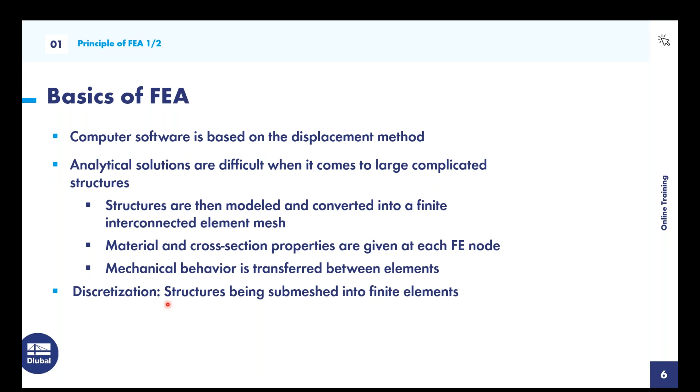And so with FEA software, structures are modeled and converted into a finite interconnected element mesh. Materials and cross-section properties are given at each of these FE nodes, or finite element nodes. And mechanical behavior is then transferred between these elements. So taking a structure and then submeshing it into finite elements, this is called discretization. So I believe this is an important vocabulary term to know when it comes to FEA software.

Then in the third step, the composition of the entire structure takes place. In the fourth step, the boundary conditions and supports are then defined. So these, for example, could consist of sliding, rigid, or hinge supports.

And then the fifth step, the displacement vectors can be determined by solving for the system of equations. And lastly, the support forces and then internal forces can be determined just like I mentioned with the displacement method.

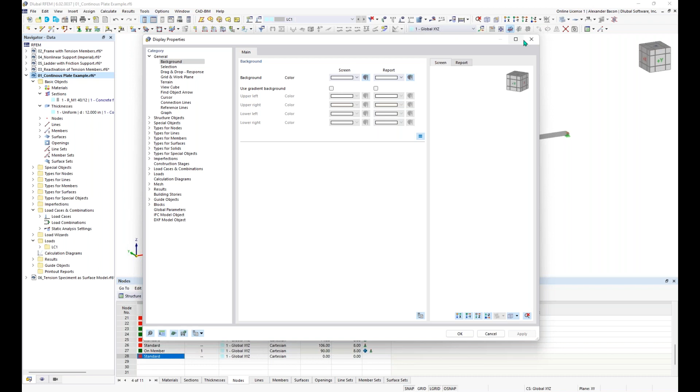So then next bit of information is here we have the work window. And so with this work window, you can see we have the graphical view of our model, and you can manipulate this model using the scroll wheel on the mouse. So clicking in the scroll wheel allows you to move the model in translation. Holding control and clicking in the scroll wheel allows you to rotate the model. And then, of course, scrolling in and out with the scroll wheel allows you to zoom in and out of the model.

Up at the top here is our toolbar, and this is filled with all of the necessary tools we would need to model graphically. Also, you can see, or should see, that this is all organized into categories, and you can move these bars around here and customize this to the way you like it. Or if you just wanted it to look the way mine does right now, you can right click in any of this open space here and hit the restore to default layout, and this will organize your tools like how it looks for mine.

Then up at the top here, we have the insert menu, and this is helpful if you can't find the tools you're looking for in the toolbar. So you can go to insert, and then you can locate the tool you're looking for as it's organized in these arrow menus.

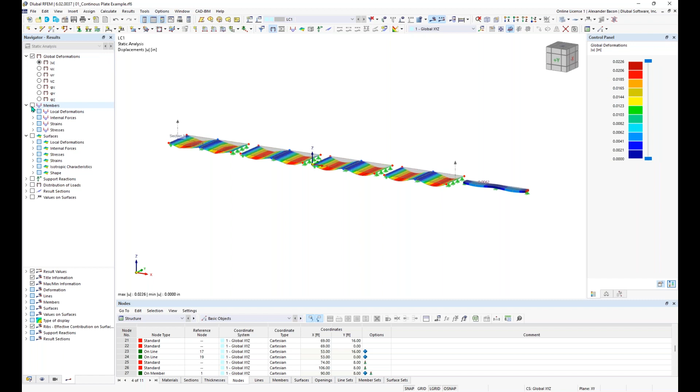So we can turn off visibilities, and then if I turn on, I've already run the results for this model. So if I turn the results on, I will have the fourth tab here, which is the results tab pop up. And in the panel is where I can turn on or off the results I would like to view. So you can see I can turn off the results from my member, and I can turn on the results, the global deformations. And so you can view your global deformations by checking that box.

You can view the results on your member, for example, and view internal forces such as moments, axial forces, and shear. And then you can do the same for the surfaces. We'll be going through this more in detail later. And that's the gist of viewing the results.

And one other thing I wanted to mention before we move on is highlighting. So if you drag from left to right, anything within the box that's engulfed in the box will be selected. And then if you drag from right to left, anything touching the box will be selected. So that is how highlighting works. And with that said, that's an overview of RFEM 6. And now we can move on to creating our continuous plate.

But before that, I would like to give a test of some questions. So the first question should pop up soon for you. And then once we go through these two questions, then we can move on. So I'll give everyone about half a minute to a minute to answer that.

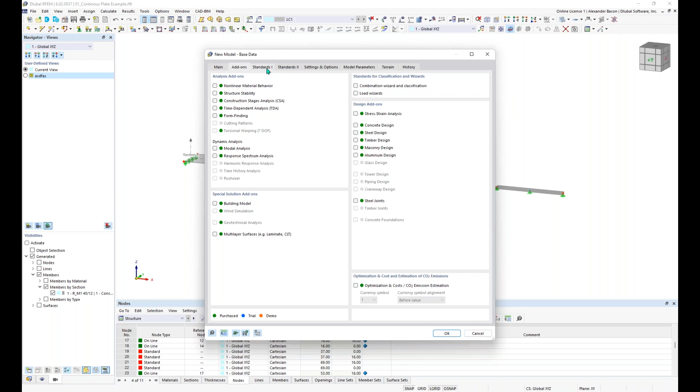I'm also going to turn off the standards for classification and wizards, as we're not going to be modeling according to any standard or creating load cases and combinations per any standard. So we can turn these options off, which means we can skip through standards 1 and 2 tabs up here.

Under the settings and options tab, we can choose the orientation of our global axes. So for our global Z axis, I'm going to keep this set to upward. And then also for our local axes, which is denoted using lowercase x, y, and z throughout the program, for our surfaces and members, we're going to keep this set to upward as well. Model tolerances and these other settings we can leave as default.

I'm going to be using imperial units throughout this training. You can switch between imperial and metric units by going down here to this button and clicking on units and decimal places. Then you can go down here to load, save template, and change the default units you have set, and change between units as well here. I'm going to keep mine in imperial units, click OK, and this should open up a blank model.

Now we can edit the grid points and units. First you'll see in the blank model that our grid has been created here, it's a blank grid, and we have our grid points here. Right now by default, if I go up here to the button settings of work plane, grids/snap settings, if I click on this, you can see I have mine set to a default of 50 by 50 grid points.

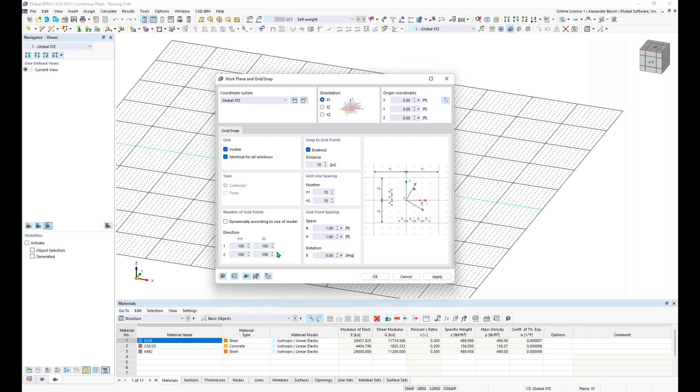So I saved this as a template, and we can go to load template. You can see I saved this as a template called student training. You can set different templates as the default if you're using the same settings over and over again. So if I click OK, you can see that my template was loaded in, and I have 100 grid points by 100 grid points with a spacing of 1 foot by 1 foot.

So now if I click OK, you'll see that my grid here was increased by 50 grid points. And so now we can get into modeling our concrete slab.

The first thing we want to do is go up here to the new rectangular surface. With this tool, we can use this to, like it says, create a new rectangular surface. And this surface is going to have a material...

Sorry about that. The surface is going to have a material and thickness, so every surface in RFEM has to have a thickness and a material set to it. You can see you can choose a stiffness type for the surface, we're going to stick with standard today, but we do have rigid and membrane and load transfer.

First, we're going to create a new thickness using this button here, so we're going to hit create thickness. This thickness is going to be uniform. And every surface thickness has to have a material set to it.

So I'm going to click on this button here to import a material in from the material library. I filter to the United States, concrete, and the ACI 318-19. I'm going to choose concrete with a compression strength of 4,000 psi, click OK. Now I just need to enter in a thickness, and that's going to be 12 inches.

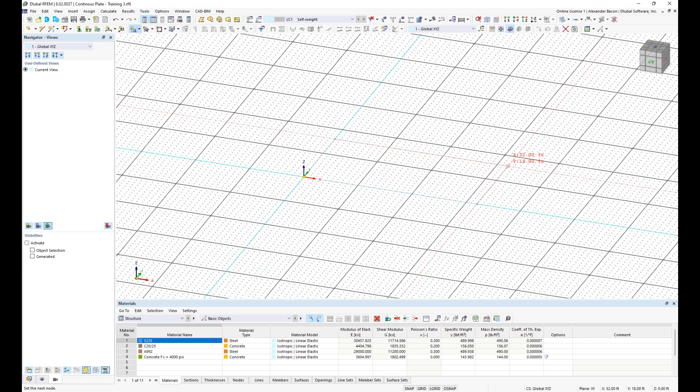So I just need to give the program 2 points on where this rectangular surface is going to be. The first point is going to be at the origin. And then the second point is going to be at 32 feet in the X direction and 16 feet in the Y direction. Click OK or left click.

And now you can see our surface has been drawn. So I'm going to right click. And now you can see our rectangular surface has been created.

So now the next thing we want to do is add supports into this surface. We're going to be using line supports, and I want to have a line support halfway down my surface. So I'm going to first have to draw a new line.

And so I'm going to snap to the midpoint of the line up here, and then snap to the midpoint of my bottom line. And so now you can see we have a middle line here.

And you can also maybe now notice if I zoom in, we have different colored nodes. So these nodes here are red, and then these nodes that I just drew are blue.

And the reason these nodes are blue here is because if I double click on one of them and go to the main tab, you can see that the node type is set to online. And what this means is under the online tab, we can see that the node is integrated with line 4 here.

So if I right click and turn on numbering, you can see that we have line number 4 here. And if I double click on line number 4, then we can also see under line number 4, under nodes online, that node 6 is located on this line.

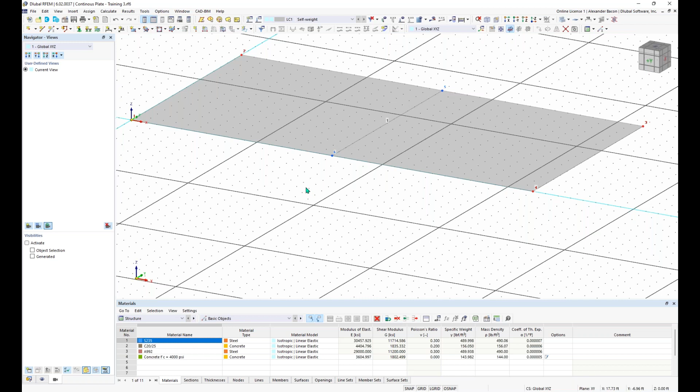And so now what we want to do is edit this line over here. So we can double click on it to edit it. And then under editing the line, we want to add some supports to this line.

So we can click on support. And then under the support tab, we can go down to the drop down here and choose this default or predefined support. That's a hinge support, click on it and then click OK. And now you can see that our line here now has our hinged line supports on it.

So what this means is that this support will support translational degrees of freedom in each of the 3 directions, but the rotation is released for rotation about each of these axes.

So now we want to add some support to our midspan here. And what we can do is we can highlight just our line here. And we also want to add support to our other side here, so I can hold control and also highlight that line. And then we can go up here to the toolbar and hit assign line support.

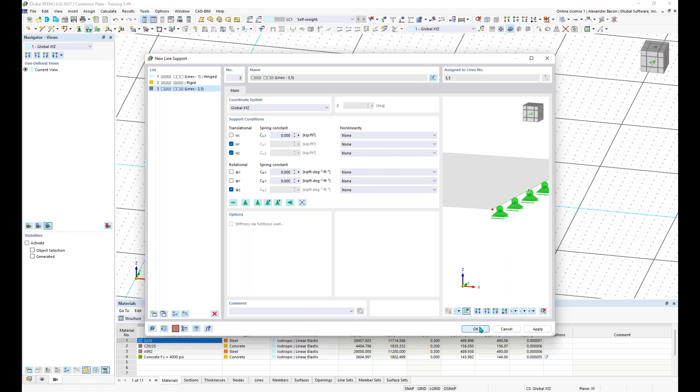And for this, we want to choose the sliding in the X direction, so you can see it unlocks the X translational degree of freedom and then locks the rotation about the Z axis. You can also see the symbol for the support has changed. And if we click OK, and then click OK again, you'll see those supports have been added.

And you can also see when clicking on elements, what elements they're tied to. So you can see our support is tied to line number 3, which is defined by nodes 3 and 4. So it's easy to see how objects are connected within RFEM if you need to know that.

So when we created this model, we already had a load case that was created automatically. If I go up here, you can see under this dropdown, it's called self-weight, LC1, and I can edit this load case by clicking on edit active load case. You can see that we have self-weight activated for this load case. I'm just going to turn self-weight off, and we only need to worry about one load case, which is good.

We're going to be adding some loading to this plate now, and every loading requires a load case to be assigned with it. So now that we have our load case created, we want to go up here to the tool new surface load.

Clicking on new surface load, this dialog box will pop up. Here we can set our load type to force and then uniform, and we can set our load direction to global and the Z axis on true area. Then the load magnitude will be set to negative 0.21, which is 210 pounds per square foot. And we can click OK.

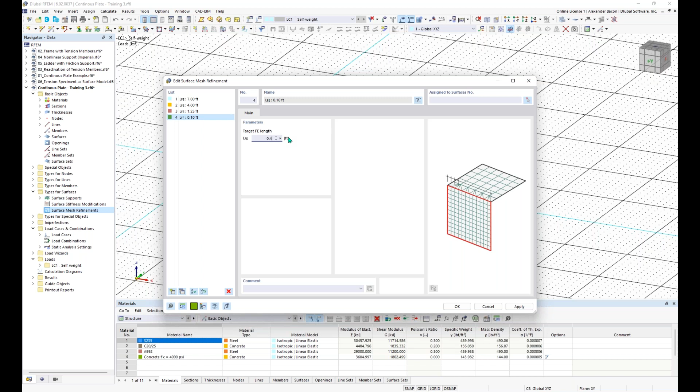This first one, we want to make the FE length set to 7 foot. The second one will be set to 4 feet. The third refinement will be set to 1.25, and the fourth refinement we'll set to 0.4. Now if I click OK and expand my surface mesh refinements, we can see that we created them, but they're this light blue color because they're not assigned to any surface. We'll just leave this as is for now.

What we want to do next is make some copies of our surface here. I'm just going to highlight the whole thing with the loading and everything and go up here to the tool move/copy selected objects. I'm going to create a copy and make 3 copies in the X direction, and I want each of these copies to be displaced by a vector of 37 feet.

With this set, I can click OK, and now I have 3 copies of my plates. What I want to do is take this and just move it over so it's more centered in my grid. Now we have our 4 plates.

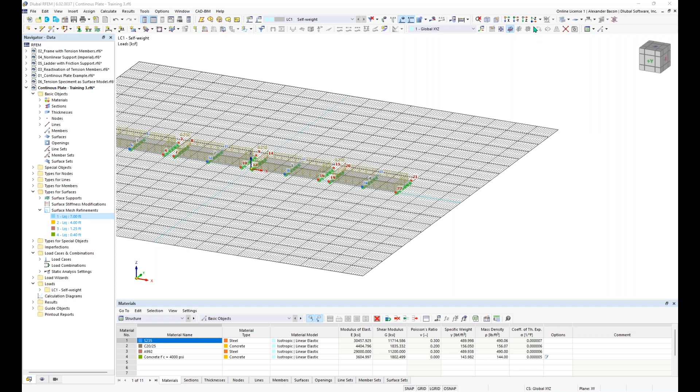Next thing we want to do, now that we have our plates modeled here, is create a new member or create our beam. So I'm going to go up here to new single member. Clicking on this button, new single member, will allow me to create a member and draw it graphically. Under the new member dialog box, under the main tab, we have our member type set to beam. You can see we have other member types here, I'll be going over these in a little bit. But beam just means that the member can take both tension and compression forces, and the connections are fully rigid.

And so then we just want to move to the section tab. And here's where we want to set our cross section. And we can set our cross section using this button here, import from section library. And so I'm going to click on that. And here you can see our section library. So we have all of our sections organized into these categories here.

I just want to go to massive and choose a massive rectangular section. And then under this dialog box, we have some settings for our cross section. And so we want to set the material. You can see I have a couple materials already predefined here, but if you need to, you can use the material library to import new materials in. And I would want to choose concrete 4000 psi, for example, just to simulate our plates.

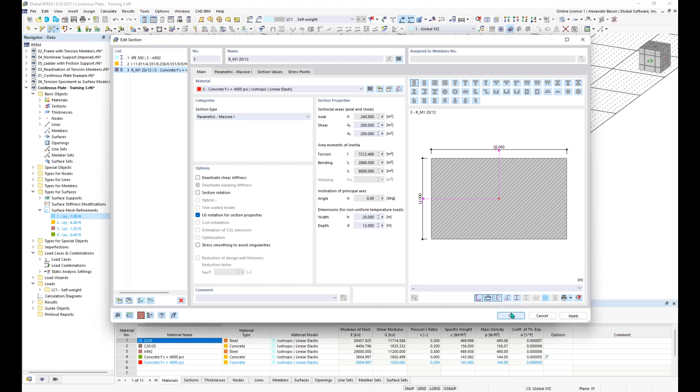And then under the parametric massive tab here, we would want to choose a depth of 12 inches and then a base of 20 inches here. And so this is going to simulate the same thickness as our plates. And then under the main tab, we can leave all of this set the same. Click OK. And now you can see our section appears here.

And you can also click on this button to display section details. And you can view your section properties here if you'd like. And so now with all of that defined, we can click OK. And then now I just want to snap to my grid points and draw this section 5 feet away from my plates. So I'm going to snap to this grid point.

And then I can either just draw out the length of my section, or I can keep my mouse going in the direction I would like the member to go. And then on my keyboard, I can type in the distance 32 feet, which you'll see will change in the dialog box up there on the left. And then if I hit enter and then right click, I can exit out of the tool and you can see my beam here has been drawn out.

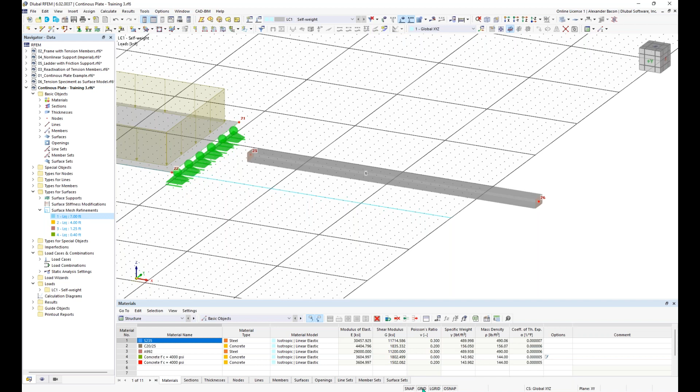And so now we need to add some supports to this beam. I'm going to turn off the showing of my grid. You can see we have some buttons down here at the bottom. And I'm going to turn off the grid here.

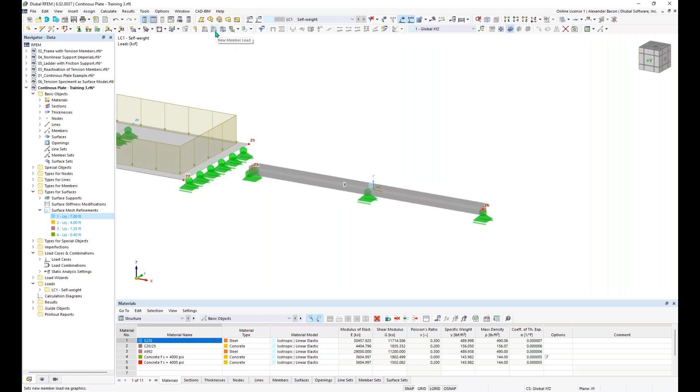So we're going to choose member load, and this load's going to be in the negative direction, just like the surface load, and it's going to be 210 pounds per foot, or 0.21 kip per foot. And so then we're going to have a force. It's going to be uniform in the z direction. And so we can click OK, graphically select our member, click OK again. And now we have our loading assigned to our member.

And so now all of our elements here are loaded and supported. I can go up here to the show loads button and turn this off. And now we need to add in our surface mesh refinements, which we didn't define. So I'm going to do that now. We can right click on one of them and go to edit, or we can click on assign to surfaces graphically. So I'm going to click that and assign my 7-foot refinement to the first surface here.

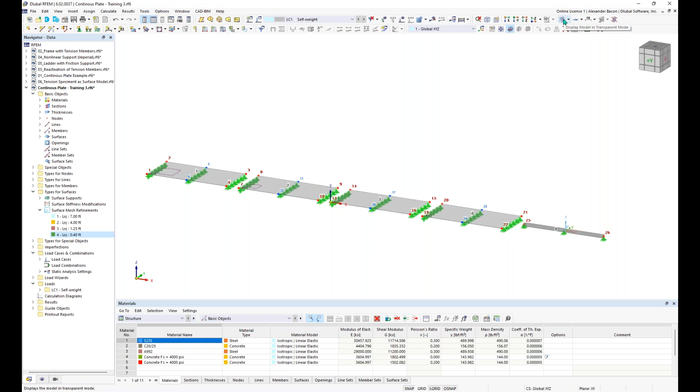Then I'm going to right click on 4 feet, assign that to my second surface, assign the third refinement to the third surface, and then assign my fourth refinement to my fourth surface. And so now I'm going to change the model to a wireframe view by clicking on the rendering button up here. And then I'm going to generate the FE mesh by going up here to this button, hitting the drop down and hitting generate FE mesh.

Normally this is done before the calculation is run, so you don't have to worry about it, but for example purposes, I just wanted to show you what the FE mesh for each of these surfaces looks like now. So focusing on this first surface, that was our 7-foot FE mesh refinement, you can see the quality of this one is really bad. So definitely expect inaccurate results from this one. You can see how it gets better as we move on to the second surface here, and better. And then our fourth surface here looks the best. So I would expect extremely accurate results from this one. So that's what our FE mesh looks like right now for our surfaces.

And now we want to add in a results section to our surfaces. So I'm going to click on the button up here, results sections. And you can see here we have our results section. The main thing we need to do is just tell the program what the first and second point is, the projection direction, which is going to be the global z direction, and then we want to show section in the local positive z direction, which you can see what it will look like on our surface here.

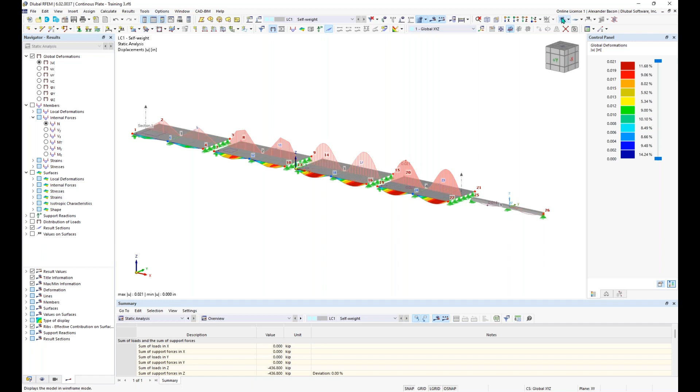So now let's calculate the results. All I need to do is go up here to calculate all results, this button here, which looks like a little abacus, and then all of the results will be run. And you can see right now our fourth tab here in the results has been added. And we are now looking at the global deformations.

I always recommend checking the global deformations as the first thing to look at, because you can always tell if there's something wrong with the modeling if your global deformations look strange. So you can see our deformations look pretty normal. They all look good. Nothing was modeled incorrectly. Good visible check. I'm going to deactivate the result sections, so we can turn off the result sections if we want by unchecking this box here in the navigator.

We can also take a look at the internal forces. So let's do that. I'm just going to highlight our last surface here and our beam. And then what I can do is go up here to this button, hit the drop down, and choose visibility by selected objects. You'll see any object that wasn't selected was grayed out. I can even right click and turn off show hidden objects in the background. So now we have an even cleaner look.

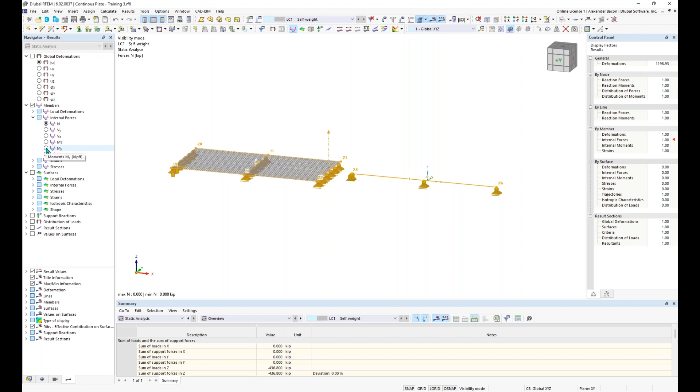And we can turn on internal forces of our member here, which will turn off global deformations. If I turn on the results for members, then under the internal forces here, obviously we're not going to have any axial forces because we just have a beam here. So we would want to look at the moments, and you can see I chose My, which is the moment about the local axis, which if you right click on the member, you can turn on the local axis system of members, and you can see what that looks like. So these are the moments about our local y-axis. I'm not sure if I said x, I meant y.

And then we can also take a look at the results on our surface. So what I'm about to show you is pretty important. To see the results on the surface as well, that's a little different. We can just check on the box surfaces here, and then similar to the member, we can go down to internal forces, and if we wanted to compare results between the two, we would want to show the moments along the x-axis.

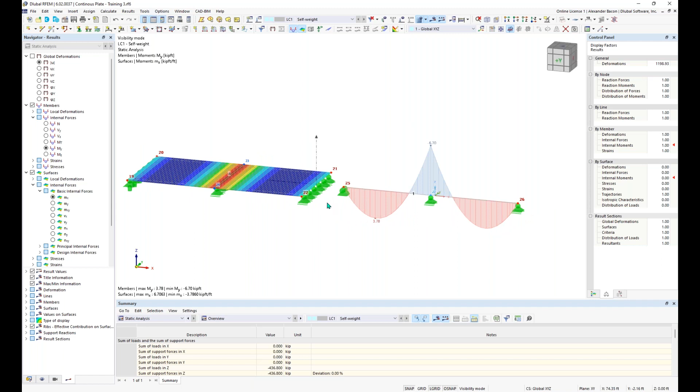So these are the moments. This is the moment in the surface along the x-axis, and this is comparable to the moments about the y-axis for the member. And so that's how we can look at the internal forces. We could also take a look at the shear, so Vx along the local x-axis of the surface. And you can even turn on the local axis system of the surface as well so we can see that. And then we could turn on the shear Vz, which is in the local z direction for the shear of our member here. And so that's how we could compare the two.

And so now let's clear our results and clear our visibility. So I'm going to go up here to this button and cancel this visibility mode. And that'll bring back the rest of our surfaces. And so now what we want to do is activate the results sections. So I'm just going to zoom out here and turn on our results sections again. And so now you can see a better comparison between those two.

And we also want to turn on the local extremes for our results sections, which is under the results sections down here. So this separate panel down here is for changing how the results look graphically. And if we go into results sections, I could turn on local extremes here. And now we can see the values of the local extremes of each of our elements here. And so now if we take a closer look at something like bending moments, we can see how the results compare between the beam here and our plate here.

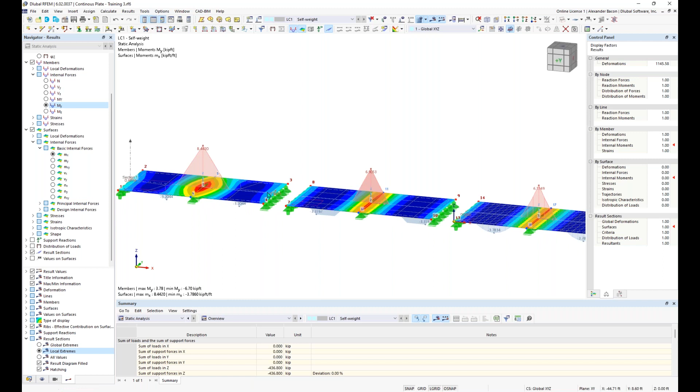So obviously the surfaces should match the beam, and this shows how important it is to make sure your FE mesh is fine enough, because you can see the superfine FE mesh here is the closest comparison. So our maximum moment at 6.70 and 6.70. And then you can see as we move down the line here and our FE mesh gets worse, our results start to stray further and further from our beam control. Results are only being calculated at each FE mesh point or node on the surface, so the finer the mesh gets, the more points of data we have, and then the more accurate results.

Keep in mind though, if your mesh is too fine, your calculation time will increase. And so you want your mesh as fine as necessary, but as coarse as possible. And so what I would recommend is something like the mesh in the third example here. And a good rule of thumb is to have at least 4 FE mesh blocks between any given span or boundary. So this second surface here would be the minimum of what I would recommend.

And so next we can take a look at the result diagram of our section cut here, which is pretty interesting. So we can get a better view of our result diagram starting from surface 1 all the way to surface 4. And it's interesting just to see how we have very few points of data for the first surface, which looks very inaccurate, and how this gets smoother and smoother as our FE mesh starts to increase and look a lot better.

Can you show us how to create a user-defined material? Okay, yeah, that's a good question. So I can switch back to RFEM to show this. So if you want to create a user-defined material, you can go here to the data tab under the navigator. And then you can see here we have our materials, which are the ones we pulled from the material database, and I can right click on the materials here and click on new material.

And then instead of importing a material from the material library, we can choose the option here, user-defined material. And then you can see here, we can just enter our material properties manually. So that should answer the question, I think.

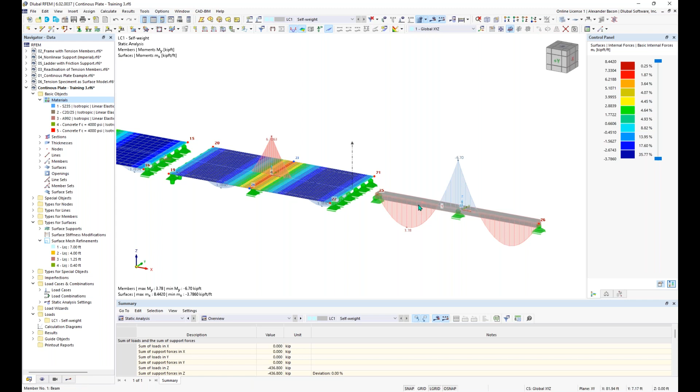With hand calculations, you assume that a beam like this has infinite shear stiffness. And so this plays a major role when it comes to a material like concrete as well. So this is taken into account, like I said, by default in RFEM, and you can deactivate this so your hand calculations match. So if I wanted to deactivate shear stiffness, for example, with this beam, I could double click and edit the beam.

And then you would want to go under the section tab here and edit the section. And then under the options for the section, you can deactivate the shear stiffness. So checking that off, I'm going to click OK. It's going to tell me that these actions are changing the results, and the results are going to need to be recalculated. Do you want to continue? Yes. Click OK. And so now we just have to rerun our results, and now we can see how the results deviate from our previous results.

So now you can see something like our member bending moments have now increased to 6.72. Before they were closer to 6.70. And so that is what happens when you take into account or don't take into account shear stiffness. And these are the results you should see if you're doing hand calculations.

Now we can move back into RFEM. Actually, we want to move back into the PowerPoint so we can go over and discuss plate theory. So to help understand plate theory, I'm going to use some beam theories as an analogy.

One of the beam theories is Bernoulli's theory, which comes with these assumptions. The first assumption is that the cross sections remain in plane and perpendicular to the member axes, so there's no warping. The second assumption is that there's no consideration of shear deformations and that the shear stiffness is completely rigid.

The second theory is the Timoshenko theory. The assumptions with this one are that the cross sections remain in plane, but they don't remain perpendicular to the member axes. This means that shear deformations are taken into consideration and the shear stiffness is limited and isn't completely rigid. So the Timoshenko theory takes into consideration shear deformations where the Bernoulli theory does not.

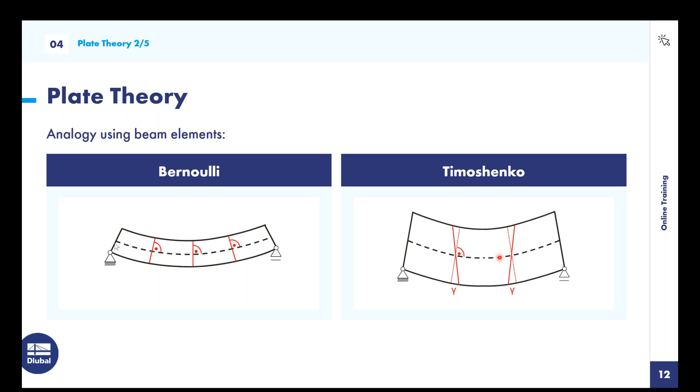Now, how do these compare to the equivalent two plate theories for plate elements? Bernoulli's is comparable to the Kirchhoff plate theory, and the assumptions of the Kirchhoff plate theory are that we use a geometrically linear analysis, so small deformations. We use a linear elastic material based on Hooke's law. The cross-section remains flat, there's no warping. There's constant thickness, and there is no consideration of shear deformations.

Similar to the Timoshenko theory, we have the Reissner-Mindlin theory, which works the same for plates. Here we're making basically the same assumptions as the Kirchhoff theory; these first four assumptions are the same. But what's different is we consider shear deformations, and we also take into consideration transverse/lateral strains for this theory. So with Kirchhoff theory, we don't consider shear deformations, and with the Reissner-Mindlin theory, we do.

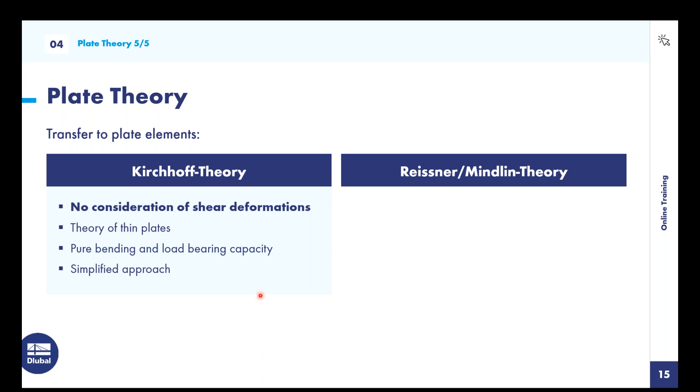Whereas the Reissner-Mindlin theory is great for the use of thick and thin plates. The reason for this is because we do consider shear deformations, and you have to take into consideration that the shear influence component is relatively high. If you're neglecting shear forces, you're going to have a significant error. This is a high value approach and increases the accuracy of your shear forces. So in my opinion, the Reissner-Mindlin theory is what you should be using all the time, but it's good to know the difference between these two theories.

Now to relate this back to RFEM, we can see where the settings to choose between these two theories are located. We go under the navigator, under the data panel, and then under the static analysis settings, to the settings that we're using. We'll edit the static analysis settings, and you can see we're using the geometrically linear analysis for our load cases. All load cases are calculated using a geometrically linear calculation by default.

Under the basic settings, you can see we can change our bending theory from Mindlin to Kirchhoff if we want, and click OK. And we should see a difference in our results.

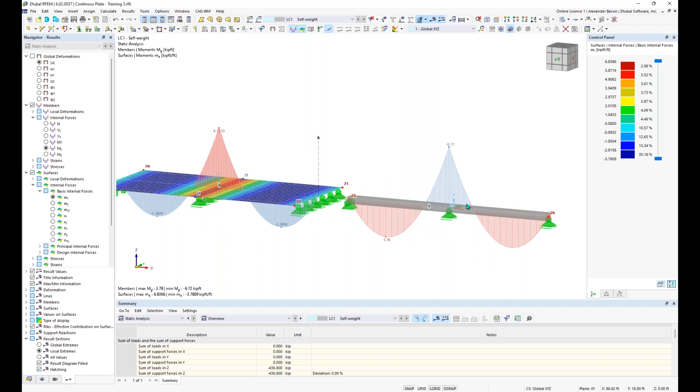So you can see now our results match more closely to our beam here. This is because both of these are now not taking into consideration shear deformations. Now we would have a bigger delta in our results if we were using a thicker plate, such as a foundation plate, and also the shear forces and deformations would change as well.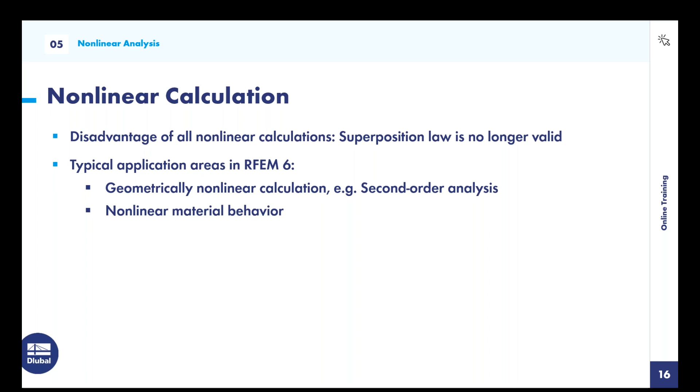We also have nonlinear behaviors for structural objects like members, hinges, and supports, for example. I'll be showing examples of all three of these areas in RFEM 6 after this. Also keep in mind these types of calculations increase accuracy, so that's an advantage, but another disadvantage is that the calculation time can also increase when adding nonlinearities.

So now let's go back to RFEM and go through some examples. I'm going to open a previously modeled model by going up here to the Open Model button. I have set up a frame with tension only members, which I'm about to show you now. Actually I have this opened already, so if I open this up, here is a frame.

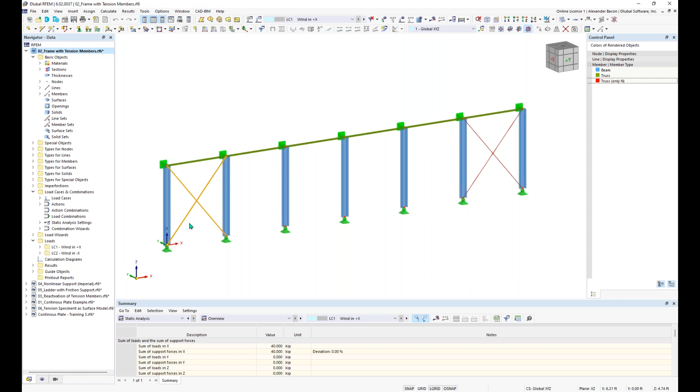If I try to run my calculation here, also just to mention I have loading pushing on this as our wind in this direction, so if I try to run my results here, I'm going to get an error. This is telling me, if I click OK, that the stiffness matrix is singular, so we have an instability, is what this is telling me.

What the program is doing is checking the stiffness matrix, and if there is a singularity, that means the structure is unstable. You can see it says the structure is unstable here in this error because we have no bracing in the X direction. This whole thing is able to just fall over.

So what we need to do is stabilize it by adding bracing. I'm going to show you how to add bracing back in. I'll go up to new member, and under member type I'll choose truss. It says only axial forces, so this truss member can only take axial forces. It cannot transfer shear or bending moments.

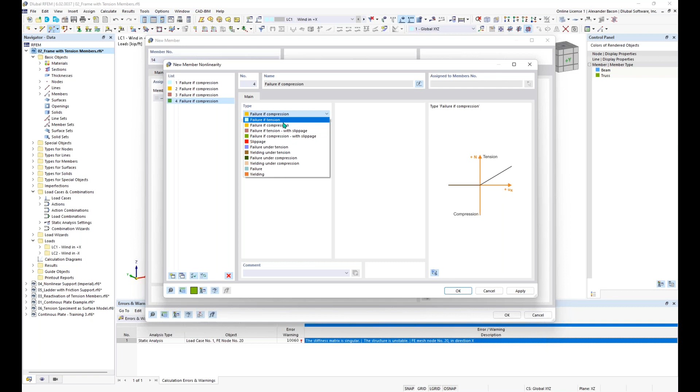So what we want to do is also check the nonlinearity option here, and then this nonlinearity tab will pop up. I want to create a new nonlinearity and set this to failure if compression. What this does is make it so if this member takes any compression load, the member will fail. We're assuming these are cable-like elements that can't take compression. You can also see other types here, such as slippage, failure if tension, and some other options. So we'll click OK.

Then we'll go back to the main tab and click OK again. Now we can simply draw in our bracing from node to node by just left clicking. I also just realized I forgot to change the cross section - that's fine, we're just going to continue drawing these. Oops, not sure what happened there.

All right, just going to restart the program real quick, sorry about that. That was strange - sometimes the program might force close every once in a while. The good thing is that if you forget to save, the program automatically keeps backups of all your models, so I'm just going to restore these real quick. Shouldn't take too much longer, we can get right back into it.

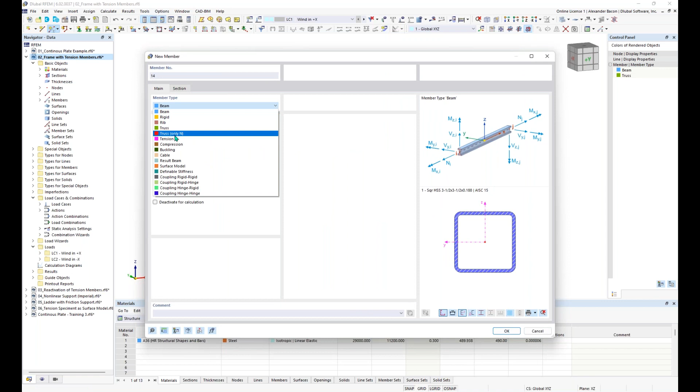Okay, there we go, back to drawing the section here. I'm going to delete this one and create a new member, set this to truss only, nonlinearity, failure if compression, and section - I forgot to choose the section last time. We're going to change this to round, 0.75 inch diameter, and click OK.

Now we can draw our members here, our X bracing. We can draw that out, then highlight it, hold Control and drag to make a copy of it. Oops, let me try that one more time. So you can highlight things, hold Control, and then drag and drop them to make a copy. Now we have our tension-only truss members here.

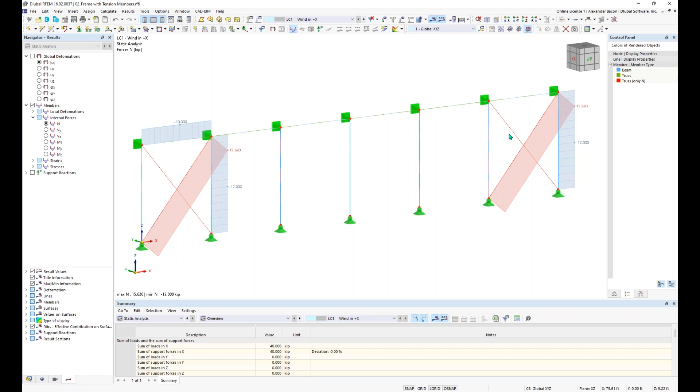Now if we run our results, we get no error. If we take a look at our global deformations, you can see only our X bracing member in tension is giving us results, whereas our tension-only members that received compression forces have been deactivated, so they're no longer in the calculation - they're not adding stiffness to the structure. If we turn on members and internal forces and look at our axial forces, only the members with tension forces are showing results, whereas members with compression have failed and are not showing axial forces.

So now we can move on to the next example. This model, if you are opening these models with me, is called reactivation of tension members, model number 3. For this example, I'm going to show you that sometimes a structure cannot handle the loading applied to it, even if it's stiff enough - it could be stiff enough, but it may not be able to handle the loading, and it might be unstable.

You can see here we have a frame, and if I turn on the loading, you can see this frame just has these nodal loads adding compression to our columns here. You can see we have a truss member up at the top here, and again a normal truss member cannot transfer moments at the connection points - it can only transfer shear and axial forces. You can also see we have tension-only members here for our X bracing, so these are nonlinear members and can only take tension forces. So let's see what happens when we run the results.

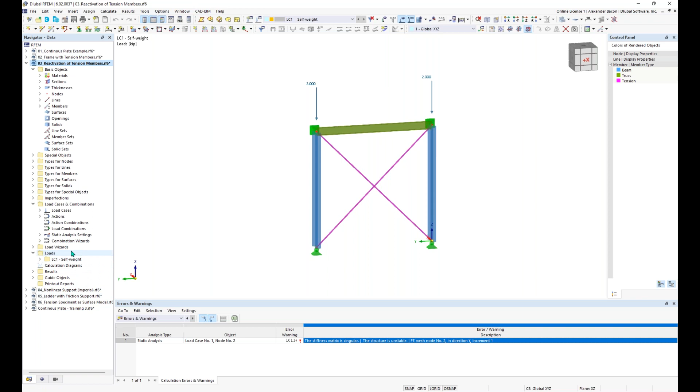So how can we avoid this? You would think the structure should be fine. Well, there is a setting for this. If we go under the static analysis settings, or edit our load case, you can see we're running this according to a second order analysis. If we click edit, we can edit the settings. Since we have nonlinear elements, we have this tab called reactivation, and under reactivation, an option called exceptional handling. What this does is, after the first iteration, RFEM will not remove the tension members experiencing compression forces all at once. It will remove these members each iteration, step by step. So the failing members are removed one at a time in each iteration. That's what this option is for.

Okay, so turning that on, let's see if our calculation runs now. We can hit calculate. Now you can see that our calculation runs. This is how we can take into account nonlinear members for a structure that may be stiff enough and you would expect to be stable. That option allows us to now run the results for the structure. You can see this member is fully deactivated when this member is taking tension forces and supporting our structure in the X direction.

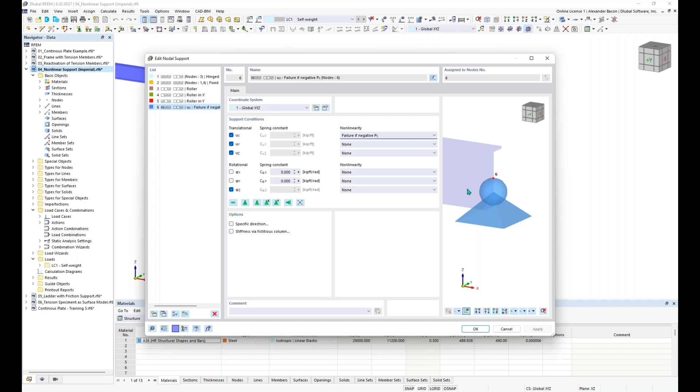So we can click OK again, and I turn on my loading, you can see I added the same loads here to each side. If I run the results, click OK, we should see that the deformations should be shown.

Sorry about that. Program does not seem to want to cooperate with me today, which is very strange. Usually this all runs pretty smoothly. So while I'm restoring these, should be pretty quick. Again, sorry about that. Strange. All right, so...

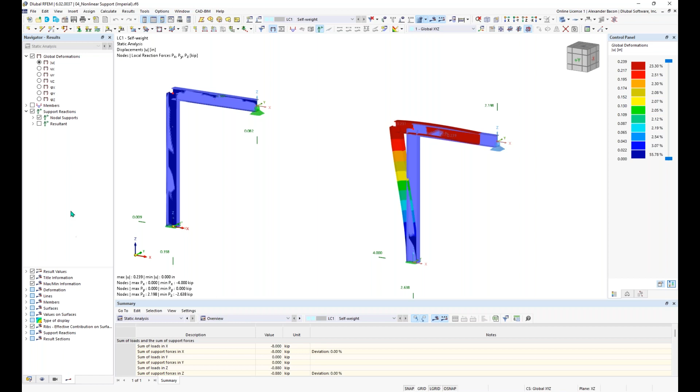Let's go back to our nonlinear support and try running our results again. Okay, so this is what I was trying to show. Once our results have run, I can show my support reactions, turning on support reactions under the result navigator. If I turn this into a wireframe view, you can see our deformation on the right-hand side, so this support has fully failed because it's experiencing negative forces in the X direction. If I go down to static analysis and results by node in the table, under support forces, our node over here, node number 3, is experiencing negative support forces, and our node on the right-hand side has no negative support forces, because it's totally failed, and the cantilever is now pushed into the X direction where this support is supporting the cantilever at the top, so the deformation is not into the X direction.

So yeah, that's how you can take into consideration nonlinearities for supports. We can move on to the next example, called ladder with friction support. With this example, you can see I have a ladder that I modeled here, and I created about 16 load cases so that each load case has a point load on each rung of the ladder. Turning on my loads here, I can use these arrows next to the drop down to go through, and you can see that each rung of the ladder has a point load of 1 kilonewton applied to it.

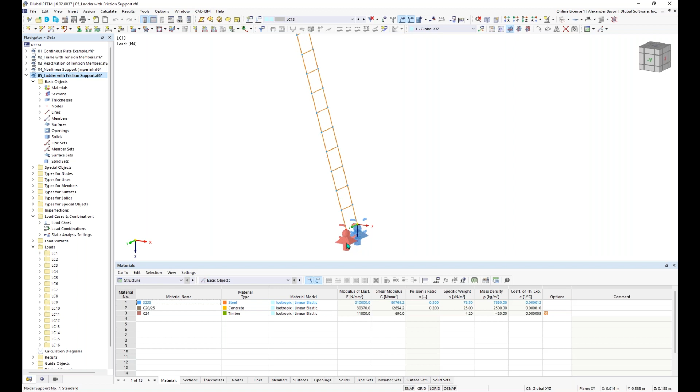And as I go through each of my load cases here, I'm going up the ladder, and you can see, the point of this example is to see at which height this load gets to where the friction that the ladder is using to be supported down here gives out. So you can see our supports down here are blue. And the reason they are blue is, if I edit them,

I've created some friction supports, which is another nonlinearity. So I turned on the nonlinearity for the translational X and Y directions, and the friction is based off of the vertical forces. And so turning on friction for each of these directions, you can see the two tabs up here. So for UX, we can enter in a friction coefficient, mu x here, which is 0.2.

And so this means that this support will fail if the force of 0.2 times the vertical force Pz is exceeded. You can see that here in the graph. So if I click OK, and we go to load case 1 here and run the results, and I click yes. You can see that at the bottom here, these supports are fully activated. And this is the deformation we would expect from our ladder with our supports fully activated.

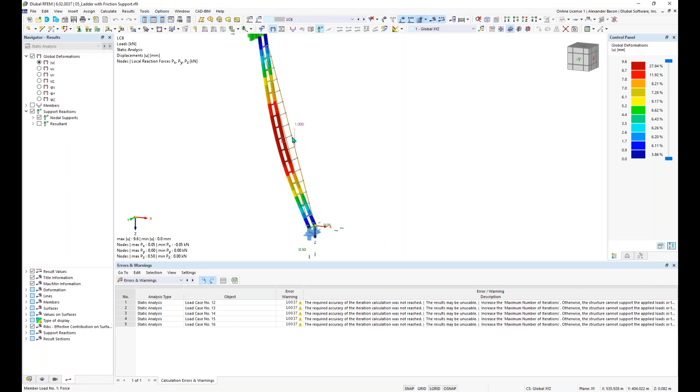So you can see as we go up the ladder that once the loading gets to about this height here, we're at 0.05 kilonewtons. And you'll see that the maximum amount of force that these supports can take in the x direction is going to be 0.1 kilonewtons, because we multiply our mu, or friction coefficient, by 0.5, and that gives us 0.1. So 0.1 is the maximum force these supports are going to take in the x direction.

So let's keep going. And there is where you'll see that once this loading gets up to this height here, our x direction forces reach 0.1. And so our supports fail, and our ladder gives out here. So that's how you can use nonlinear supports for friction supports. And now we can move on to the next example.

So the next example model is called tension specimen as surface model. With this example, we have a specimen here of some sort, similar to something you'd see in one of your labs. This specimen is made out of steel. And we're just going to go over the general concept of plastic analysis.

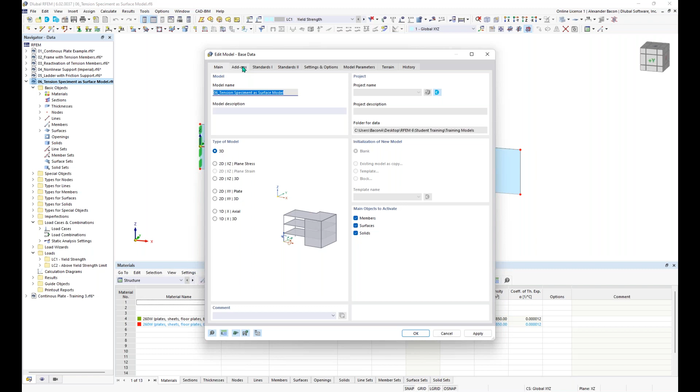So in this case, plastic behavior is what we want to take a look at. RFEM 6 can consider nonlinear behaviors like this. To do this in RFEM, we have to go into the base data. We can right click on our model here and go into base data. To take plastic analysis into consideration, under the add-ons here, you have to activate the add-on nonlinear material behavior. This add-on is required, and it allows us to activate different material models.

So let's click OK. And now let's run the calculation on this surface just using a linear material model. If I double click on this surface here, you can see I have two materials that I've already pre-made. The first one here is a linear elastic material, and we're going to choose this one. And you can see I also have a nonlinear plastic material that I've created. We're just going to take a look at the linear elastic one first.

And I've also added in some loading here. So I'm just going to run the results so we can take a look at them. And here you can see the results.

And so we can see the deformation here, but we can also take a look at the surface results and the stresses on the surface by going to surfaces, stresses, and then under equivalent stresses and under von Mises stresses, we can take a look at the von Mises stresses on the surface. And this is a kind of stress hypothesis that is known most commonly to be used for this kind of stress design for steel sections or surfaces.

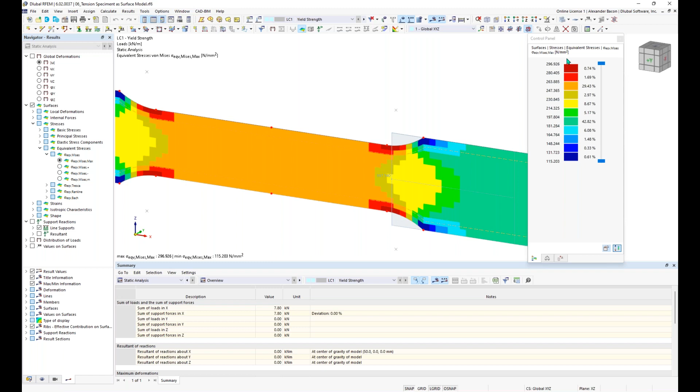And this tensile stress should be only up to the yield strength in reality. We shouldn't in reality be seeing stresses on the surface here that are past the 260 newtons per square millimeter.

And we can see the tensile line load that I've added here. The maximum amount of force that this specimen can take before it reaches the yield strength: we have to take the yield strength of 260 newtons per square millimeter and multiply that by the smallest area of our surface here. So that would be 260 times 10 millimeters by 3 millimeters, and that'll give us 7,800 newtons.

And so then we can take that tensile force and turn it into a line load by dividing it by the length of this line here, which is 14 millimeters. And then converting that, we get the value here of 557.14 kilonewtons per meter. And so that's the maximum amount of tensile force that this specimen should be able to take.

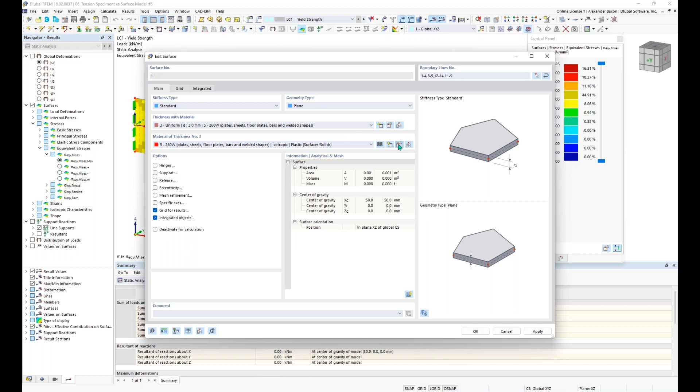So let's double click on the surface here, and we can choose the material that I already have pre-made here, the second one. And we can also edit this material. So let's just take a look at the details of this material real quick.

We can take a look at the different material models that are located here. So we have linear elastic, plastic for members, plastic for surfaces, and then a list of other nonlinear material models that you can choose from. We're using the isotropic plastic for surfaces and solids. Choosing this will activate the tab up here, isotropic plastic for surfaces/solids.

And so then under here, you can adjust the yield strength for tension and compression individually. And you can set up here according to what hypothesis you want the stress failure to show. We want to keep this set to the von Mises hypothesis for looking at those types of stresses. And so now we can click OK and click OK again. And our material changed, so we have to rerun our calculation.

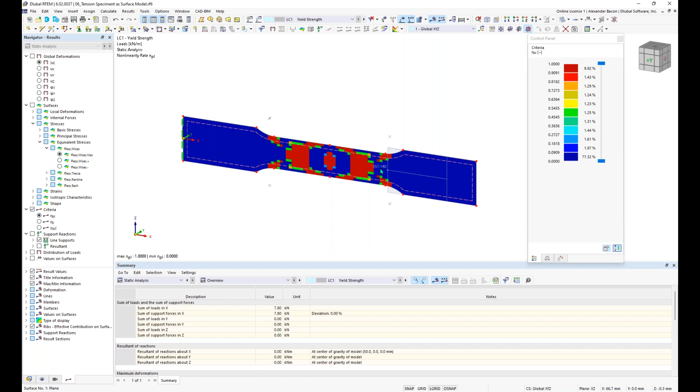We can turn on the criteria here, and this shows us exactly where the material is yielding basically, and going past the point where it can handle the stresses. And so this is what it looks like when you use a plastic material, and this is more accurate. And so we can also take a look at what happens if we increase our loading to something that's higher than what the yield strength is.

And again, you can see if we look at our results here that we're also not getting anything higher than 260, and our material is yielding. And we can also take a look at our deformations. So you can see here what our deformations look like for right before the material yields. We're at 0.1 millimeters. So the material has not yielded or gone into the plastic region yet.

And if we change this to load case 2, where we've gone past the limit of what the material should be able to handle, you can see now we're at 4.4 millimeters and the material has yielded. And you can see that in the neck here of the test specimen that it's thinning out. And we can also get a nice animation of what that looks like as well. So that's how you can utilize plastic materials in nonlinear effects in RFEM 6. And so this is very similar to what you should see in a lab experiment.

And so our last two examples are going to be on singularities. So I'm going to go back to the PowerPoint, and, okay, so sorry about that. Before we get into the next section of nonlinearities, we're going to take a break. But before the break, I just want to ask if there's any questions that were asked. Yes. Siska. Yeah. Yes, hi, Alex. There's a couple of questions.

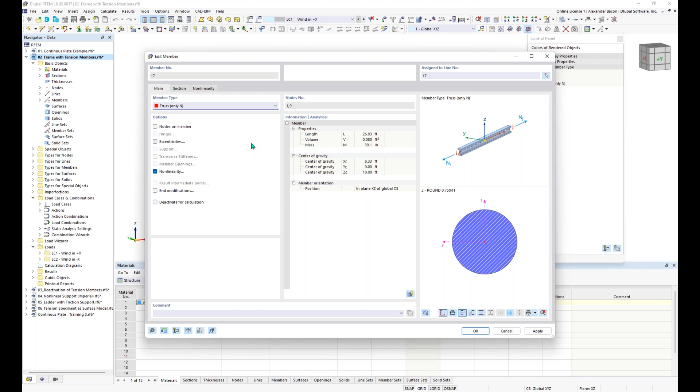Yes. And the second one, if we're able to import or export into AutoCAD, and if you want to show them how to do that quickly. Yeah. So just real quick, you can import and export back and forth between AutoCAD. We do have direct integration with AutoCAD. So what you can do is go to File, and then you can go to Import, and then you can choose this option here, AutoCAD. And I don't have AutoCAD running right now, but if you did, a dialog box would pop up.

And you can only import and export lines between AutoCAD. You can also have information with these lines, such as cross sections and materials. So when you're importing and exporting between AutoCAD, things like surfaces and solids cannot be imported and exported between the two, but we do have that option. And you can also use the DXF file type as another way to communicate between AutoCAD and RFEM. Okay, thank you. That's all the two questions I have for you.

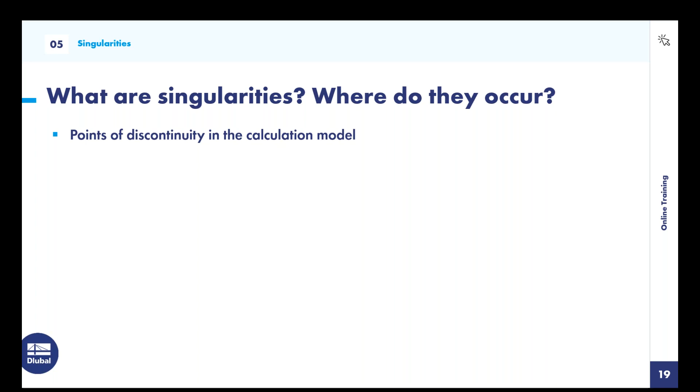All right, so let's resume. So next topic are singularities. So what are singularities and where do they occur? Singularities are points of discontinuity in the calculation model, and this happens in all FEA software. And this is where the results are not accurate and can't be trusted with singularities.

And so what this means is that there isn't really any issue with how the software solves the model, and there's not really any physical issue with the model itself. So keep that in mind when it comes to singularities. Singularities can show themselves as infinite stresses or internal forces. And so with singularities, things like mesh refinement do not improve the result. Mesh refinement only gives you a better idea of where singularities can occur.

And singularities occur in FEA software when the loading or forces are all applied to only one single finite element node. And so the typical singularity locations are usually point and line loads and supports. And the solution to this would be something that I will show you on how to avoid these in the next RFEM example. They can also occur at openings and re-entrant corners. And to solve this issue would be to add in some rounded corners instead.

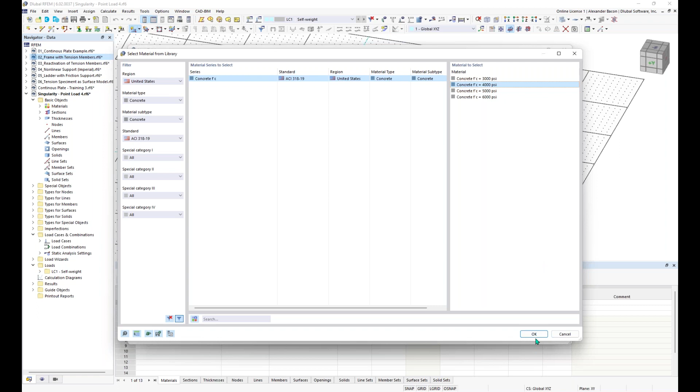And very similar to the first model we created, I'm going to go up here to the toolbar and choose the tool New Rectangular Surface. And again, I'm going to create a new thickness because every surface needs to have a thickness of material to it. I'm going to just simply use concrete 4000 psi. Click OK. And the thickness is going to be 12 inches. Then I'm going to click OK and click OK again.

And then I'm going to draw my rectangular surface here and make it 32 feet by 16 feet. Right click to exit out of that tool. And now we have our rectangular surface created. So the next thing I want to do is add a node to the center of my rectangular surface here. So I'm going to go up here to node in between two nodes. And what this would allow me to do is to choose two nodes here, and it'll place a node in the center once I click apply, which you can see there. And I can exit out of that. And now I have a node placed at the center of my surface here.

And what I want to do is add a new nodal load to that node. And this nodal load is going to have a force magnitude of -10 kips. It's going to be applied as a force in the z direction. So I'm going to click OK, choose that node, and click OK again. And now I have a load of -10 kips applied to the center there.

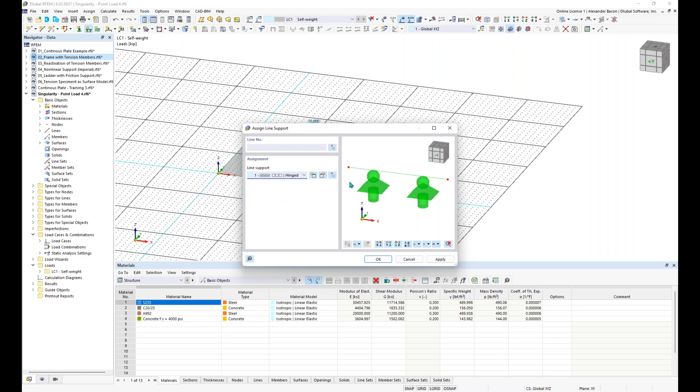And now we have our surface loaded, we need to support it. So I'm going to just support the boundary lines of this surface. So I'm going to go up here to assign line support and just choose the hinged predefinition support here. Click OK. And then I can simply just highlight the entire surface here. And that will add in my line supports to my boundary lines.

So then I want to make a copy of this. So I'm going to highlight everything and use the move/copy tool and create a copy. And I want to create 3 copies. And these are going to be displaced in the X direction, 37 feet, like so. And so now that we have our copies made, we can then create our 4 mesh refinements like we've done before.

So we can go under types for surfaces, surface mesh refinements, right click on that and click on new surface mesh refinement. And then our first mesh refinement here is going to be 7 feet, and we're just going to make 3 copies of that.

And it's going to be 4 feet for our second one, 1.25 feet for our third one, and 0.4 feet for the fourth one. And then, instead of just assigning these graphically, if we know our surface numbers, we can simply just type that in. So for the 7-foot one, I'm going to type in 1. For the 4-foot one, I'm going to type in 2. 1.25-foot would be 3, and the 0.4 feet would be surface 4. Click OK. And now you can see those symbols for our FE mesh refinements on each surface there.

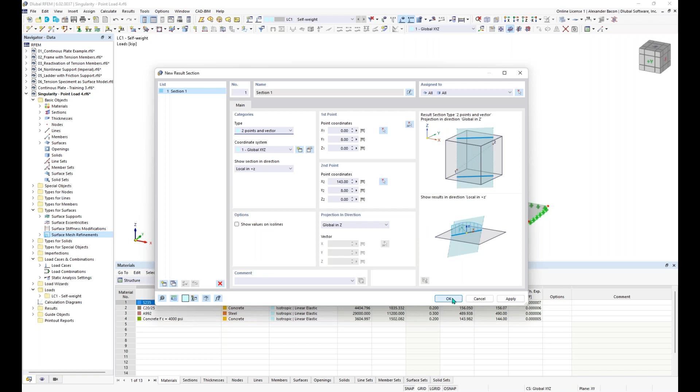And turn off my grid. And then we also want to add in a results section similar to last time. So I'm going to create a results section using 2 points. So again, this dialog box will pop up for results sections. You can just click on this button here, select 2 points in graphics. Type here 2 points and vector. And that vector is in the global z direction and the local z direction, positive z direction. So we'll click OK, and now we have our section cut there for our results.

And we also have our LC1 that was created here. So if I edit that, we can turn off self-weight for our load case there. And then we can simply hit calculate and run our calculation. So now we have our results sections activated, which you can see here. What I want to do is under results sections, turn on local extremes. And so now you can see we have our local extremes for our deformations turned on.

We can also shrink the size of our load. We can turn this off. And right now we're looking at our global deformations, which look okay. They look good. Doing a quick visible check here, and this is what you would expect from our global deformations. Let's take a look at our internal forces. So if we go to internal forces and we take a look at our bending moments along the x-axis here,

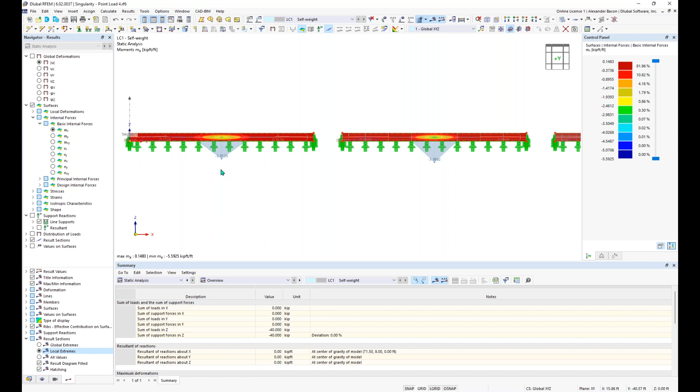this is where things start to get a little tricky, because you can see here our surface on the left is showing a maximum moment of negative 2.91 kip feet per foot. And then our last surface here is showing a very different number of negative 5.5. And so we know that the finer FE mesh here is better than the coarse FE mesh. But the question is, which moment is the right moment here between these surfaces?

And the answer is that none of them are correct. None of these surfaces are showing the correct moment that we would expect to see in reality. And this is because of singularity. And so the results aren't useful here. We can't use these results. And it doesn't matter what the size of the FE mesh is, because we have a singularity occurring, which you can see if I zoom in here. This is what you would see from a singularity.

And the reason we're getting a singularity is because we applied a nodal load or a single point load, which is just feeding into one single FE mesh point. And so the solution to this would be to take this one single point and distribute the nodal load over the surface instead of into a single load. So what we want to do is create a surface load. So we're going to take this load and divide it by a random surface area. So I'm just going to take this load and delete it. And we're going to take this 10 kips and divide it by 2 square feet.

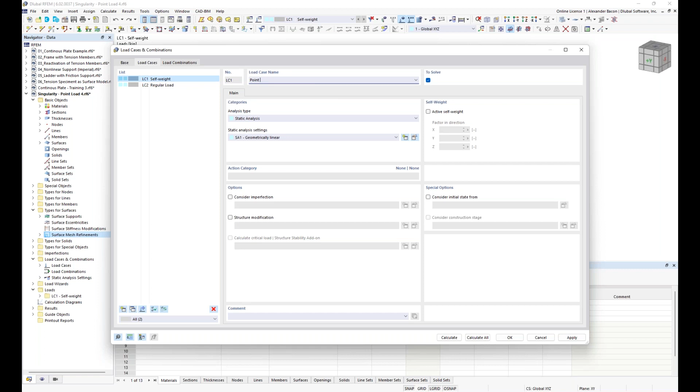So to apply this new surface load, we want to create a new load case. And this is going to be a regular load. So we're going to go up here and actually I'm going to undo this. Yeah, so we want to create a new load case. This one's going to be called regular load. This one was our point load. Going to click OK. So now for this regular load, we're going to use this tool here. So I'm going to hit the drop down next to new free rectangular load.

Sorry about that. So under here, we're going to go to new free rectangular load and choose that. First we're going to choose load distribution as uniform. And this is going to have a magnitude of negative 5 KSF. And we want to choose the load location as center and sides of rectangle. And the size of this rectangle is going to be equal to 2 square feet. So that's 1.41 for each side. And our load is going to act on the XY plane and in the global Z direction.

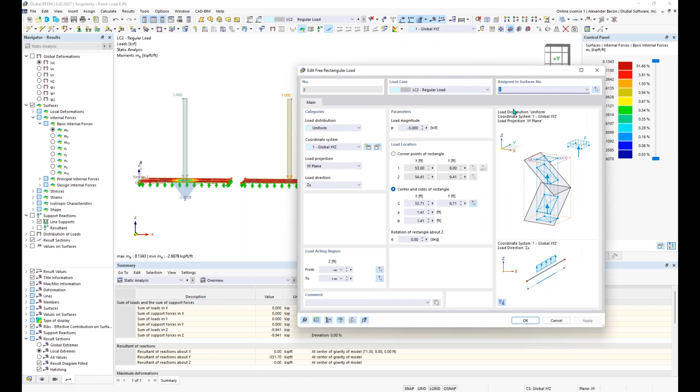And we need to make sure this assigned surface here is changed to all. So it looks like we can't do that for multiple loads. Just want to do that for one load each time. And we want to do that for the last two here. And that is the reason why we weren't seeing any results there. So let's try running our results again.

And so now we're seeing more consistent moments between each of our surfaces here, and that's because we don't have any singularities on every surface, showing we have more similar moments. And this is one way to fix singularities, is having the loading distributed over multiple FE mesh nodes instead of just feeding into one singular node. And we can compare this again to the singularity that we actually had in the first load case.

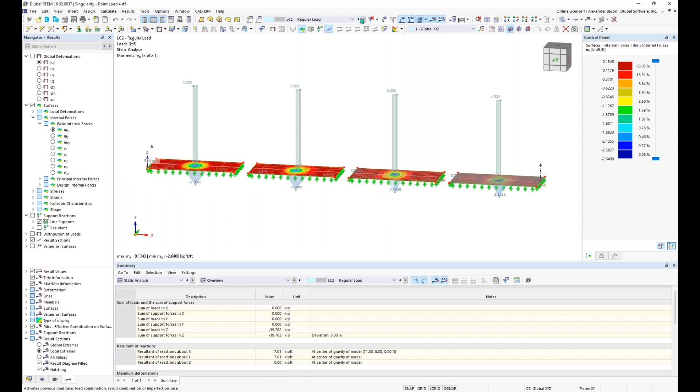So now we can also, if this occurs, instead of doing this to fix the singularity, we could look at our result diagram for the section cut we have here. So if I right click on the section cut and go to result diagrams, you can see here our singularity. And what we can do is use a tool called result smoothing. So I can click on this button, edit smooth ranges. The tool is called smooth ranges. We can use this tool to add in a smooth range, which averages out the results.

So let's say, for example, we want this smooth range to occur right on the last surface where the singularity occurs, which is 111.295 feet, and it ends at 112.705, and this is the size of, you'll see 1.41 feet, which is the size of our column that we're pretending is connecting into this element. And so we'll click OK.

And now you can see we have this smooth range up here. You can see we have the averaged out results down here at the bottom. So you can move this range around, and yeah, you can use this to smooth out the singularity here.

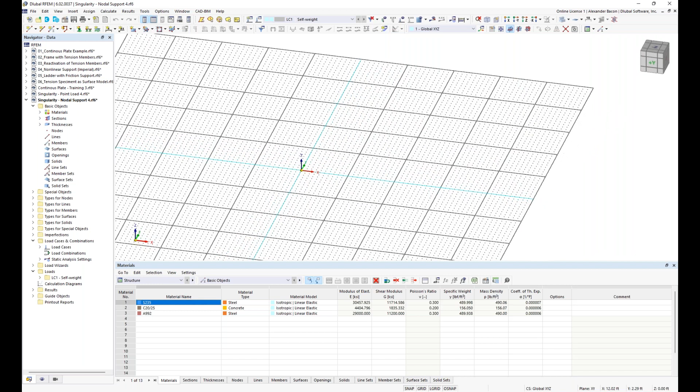And now, similar to the other model, we want to create our 4 surfaces again. So I'm going to go up here to new rectangular surface, and you can see some of my previous thicknesses have carried over, but I'm going to create a new thickness by clicking on this button. And then the material, I'm just going to choose concrete 4000 psi.

Something else to mention in the material library is if you're not located in the United States, we also have a long list of other countries and other standards you can choose from. That's how the filter works on the left-hand side. So again, we'll choose 4000 psi, click OK, and then enter a thickness of 12 inches. Then we can proceed with drawing the plate here, which will be 32 feet by 16 feet.

Then we want to model and add in supports. This line on the right-hand side is going to be a line support with hinges. I'll click OK and graphically select that line and add in our hinged line support.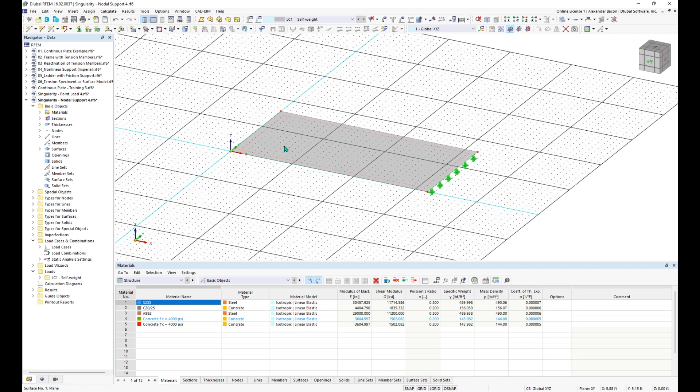And then I'm just going to create a new standard node, placing it pretty much anywhere in this region. Now we have a node integrated into our surface automatically, and I'm going to assign a nodal support to this node, just a normal hinged nodal support.

Then I'm going to add in a surface load. I'm going to create a new surface load, and this is going to be just another load, 210 pounds per square foot. I'll click OK and apply that graphically, and again we can shrink this load.

Also we want to edit our load case here and again turn off self-weight. For our load case, we don't want to take into consideration self-weight. And we also want to create some surface mesh refinements just to see the difference.

So we'll create a new surface mesh refinement. This first one is going to be 7 feet, then 4 feet, then 1.25 feet, and then 0.4 feet.

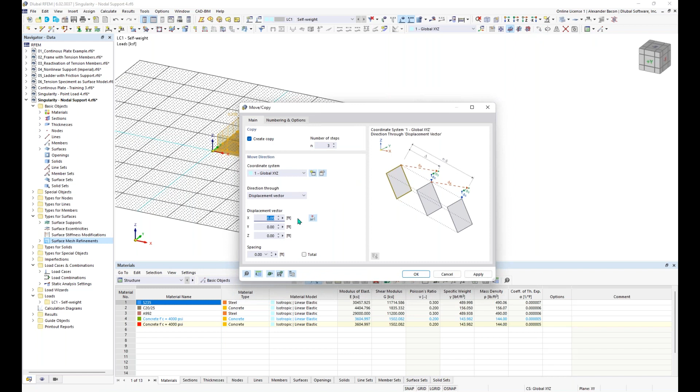So highlight that and go up here to the move/copy tool. Click on that. We want to create a copy, create 3 copies. These are going to be displaced 37 feet, again in the X direction. Click OK.

Now we have our copy there, and we want to assign our mesh refinements graphically by right-clicking on them, selecting the desired surface. So we'll assign those graphically. And yeah, once we have those assigned graphically like so...

We can add in our new result section by choosing 2 points graphically. So we'll choose our 2 points again, click OK. And now that we have our section cut here, and we have our loading applied, we can run our calculation.

So once we run our calculation, I can turn the loading off and the results sections off, and we can see what our deformations look like. So they look pretty good, that's what I would expect from this setup we have here.

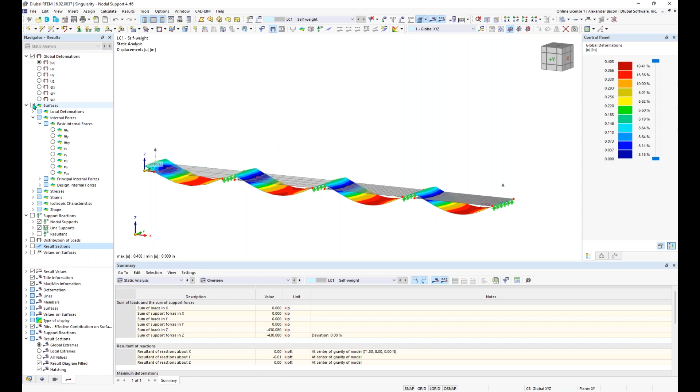But what we want to see is the singularities at these nodal supports. So all of the loading right now, if we check on surface results and then check on MX, and we turn on our results sections, all of the loading applied to the surfaces here has all been fed into the single nodal support.

So if I turn on local extremes, you can see that at that single nodal support, all of the loading is being fed into there, and we are getting super high moments at those locations because that nodal support is just sitting on one single FE element. So that's what the singularity looks like for something like a nodal support just feeding into one FE mesh node, and something you really need to look out for.

So these are not results you can rely on, and the correct result out of all of these surfaces is none of them. None of these are correct, and it doesn't matter what your FE mesh looks like. But like I mentioned before in the PowerPoint, having a finer FE mesh doesn't fix singularities, but it does give you a better idea of where that singularity is exactly located. With this, you have no real clue where the singularity is happening; you just have a better idea with this finer mesh here.

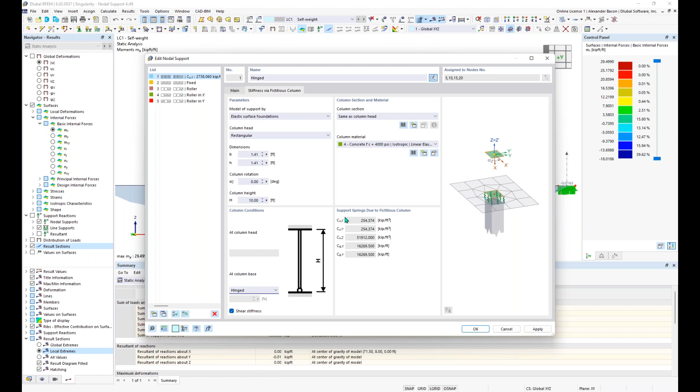Once we enter in this information, we're also assuming the base of the column is hinged, the boundary condition here. What this all does is feed into a calculation, and RFEM will calculate for you what the spring stiffness constants are for this column, and it will take these spring constants and apply them to all of our degrees of freedom for us.

So now this nodal support that we have applied, which you can see in the graphic here, at each of our surfaces is now a spring, denoted by this symbol here. So if we click OK, click yes, click OK again, now you can see that each node here is a spring, and these nodes are no longer fully rigid.

So what we can do now is run our calculation again. Now we should see - we can look at our global deformation. Not much has changed there, probably just the amount of deformation. But looking at our surface results, we can see that we now have more consistent results. They're a little different from each plate, but now they're more consistent.

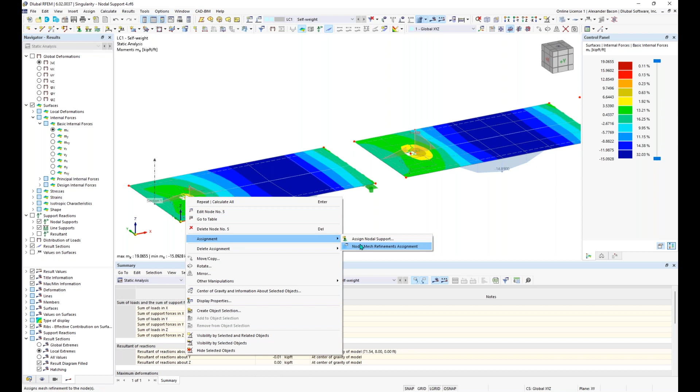And to even increase these results more at these locations, there's not only surface refinements that you can add, but you can also add FE mesh node refinements to each node here. So if you want to add those, you can right click on the node, go under assignment, and click on nodal mesh refinements assignment. Then click on new nodal mesh refinement. You can see this graphic here showing you what this refinement is going to look like on the node.

Basically, you can choose a circular refinement or a rectangular one. We're going to use circular. The radius of this refinement is going to be 5 feet. The inner refinement is going to be 0.33 feet, and the outer refinement is going to be 1 foot.

Once we click OK, yes, and click OK again, now it might be a little hard for you to see, but there is this sphere looking symbol telling me that there's an FE mesh node refinement at this node here.

And what I can do is I can hold control and drag and copy this refinement to each of my nodes, holding control, left clicking and dragging. And now when I run the results, you can see what the FE mesh looks like. So now that we have that at each surface, the FE mesh is the same for each surface here. You can see our results are basically the same now at each surface.

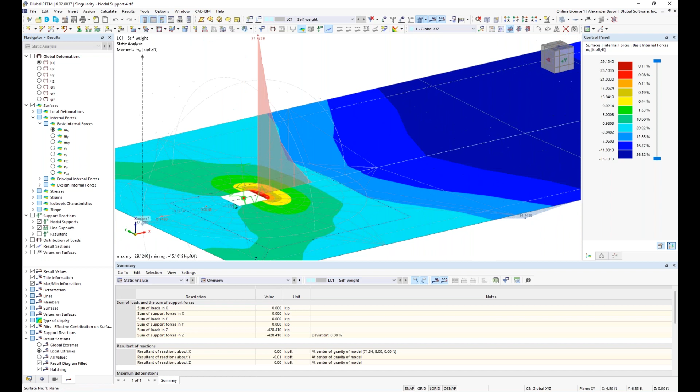And even though you can see the opening here is resembling what the column would look like on the surface from our fictitious column that we added with this node, even though we did that, you can still see that we have somewhat of a singularity occurring at this location here near the column edge.

And this is another point where you would want to basically just take note of this location where the singularity is occurring and take this into consideration for when you're doing design work on a surface and see something like this. So just important to notice things like this. So that's the end of my singularity examples there.

And now I'd just like to give another test. So I'm going to open that up now. Launch that. And if you guys could answer this test, then we can move on and go over it.

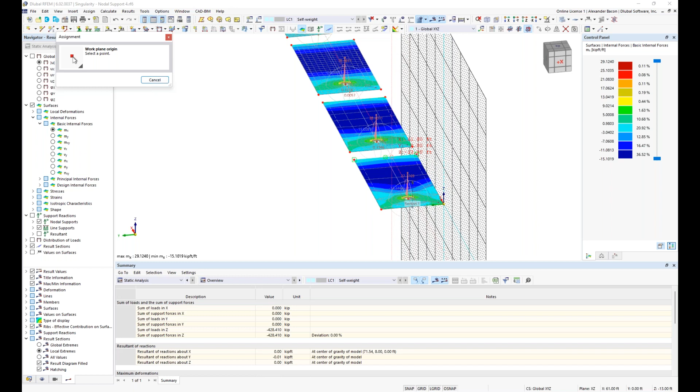So let's say, for example, I want to change my work plane here to there, and I also want to move it over a little bit. So you can change your grid work plane using these buttons up here, and you can change the origin of the grid work plane using this button. And let's say I have a wall that I just drew in here that's supporting this surface like so.

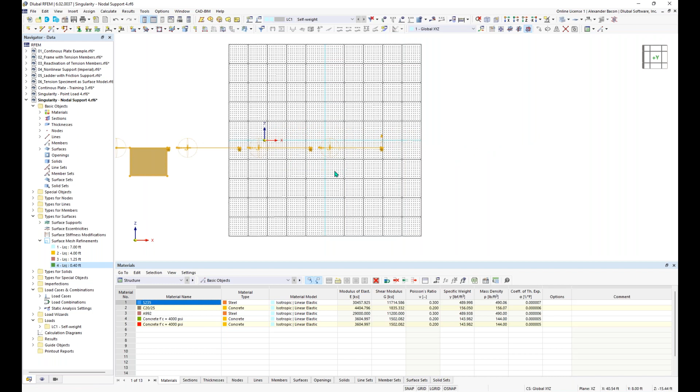So whenever you have a wall feeding into another surface, or like a slab bearing onto a wall like this, let's just say I get rid of this nodal support. We have a load applied here. Actually, this would probably be better if I just took this and placed it. All right, let's take this, just move it over like so. Okay. And I just changed my origin here like that. And let's just redraw that wall like that.

Okay, so if we had a slab bearing down on a wall like this, let's see what it looks like. So this is basically what I mean when, oh, we don't have it supported. I delete this. We need to add in a line support like that to this wall. Let's try that again. There we go.

So when that question talks about corners of walls, you can see right here where this corner of this wall feeds into this surface is where another singularity can occur, at this point here. So you want to watch out for this, and adding an FE mesh refinement like this would help, but it would also help to just make the corner of this wall rounded just a little bit, so it's not just one single point feeding into an FE mesh node like that.

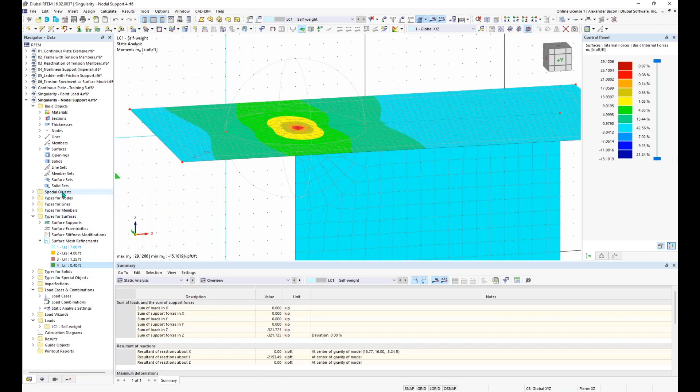And then also we have smoothing regions that you can apply to your surfaces here as well. And that is also another way to combat a singularity like this. I'm not sure at the moment where the smoothing region is located, but I know we do have them. So yeah, that's another cause of singularities.

And then the last option that was in that question, beginning and end of line supports. That's similar to a wall like this. Let's say you have a line support just like representing this wall. You can also get singularities at the beginning and end of a line support.

So that is the end of the examples that I have planned for today. Siska, I don't know if there's any outstanding complex questions you couldn't answer that we could go over. Hey Alex, no, just a simple one.

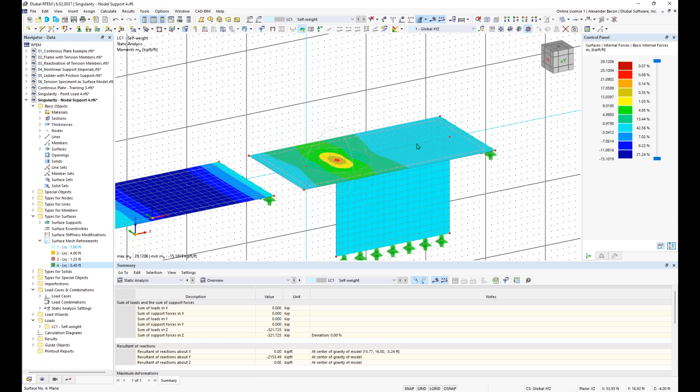Can you just go over how to turn on and off the mesh on this surface? Yeah. So do you mean turning it on and off graphically? Yes, like the squares that are shown right there, if you don't want to see that. Okay. So if you want to get a cleaner view of your model and you don't want to see the FE mesh here, you can go up here to this drop down next to the button and you can turn off the display of your FE mesh like so. Okay. Yep. That works.

And the other one is, is it possible to design welds in RFEM? Oh, yeah. So weld design is possible in RFEM. Let's say these two surfaces here are steel surfaces and you wanted to design the weld that's connecting these two surfaces. What you would need to do is go up to the base data and the model, and under add-ons we have a design add-on that is called stress and strain analysis.

And what this stress and strain analysis add-on does is it releases stresses into the program so you can view stresses on elements like members. That's what it does, it gives you the ability to view stresses on members. And so if I click OK, you can see now in the table, if I go under the dropdown, the stress strain analysis add-on is available here. And basically what this does is it allows you to run a simple stress analysis comparing the design stresses to the limit stresses of something like a surface or a member.